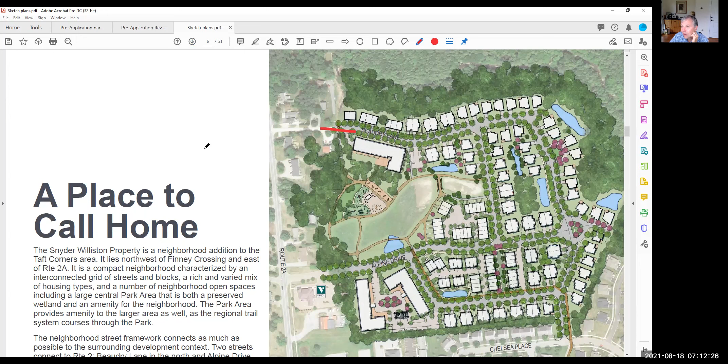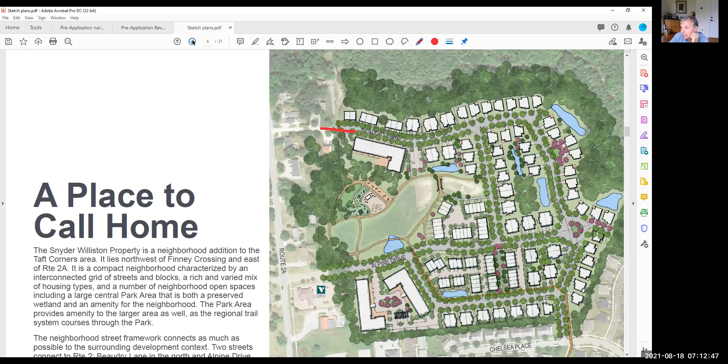One of the things we focus on as a company is that we construct homes. We don't construct houses, we don't construct units. We sometimes interchange those, but the reality is we are creating homes for people. That's our goal as a company, to build homes for people who want to live within Williston. There's a whole description and language that helped us create some of the layout and plans in here, and I'll let you all read that as you go through our presentation.

I think it's important to note where this is located within Williston. You'll see that this property is adjacent to Route 2A and adjacent to Finney Crossing, the Hamlet, and there's some commercial buildings along Route 2A as well. So it's a piece that already has relatively high dense development around it, and we are proposing to meet the planning goals that the town established by setting the bar as a growth center.

This is one thing we thought was really great and important information: walkability and connection. You'll notice there are green dots along this portion of the property, and we're proposing to complete the bike path from the north, basically from Meadow Run. It stops just after it crosses the Allen Brook and dead ends. The idea here as a component to the proposed neighborhood is that we would extend that and connect it all the way over to Finney Crossing on the western portion.

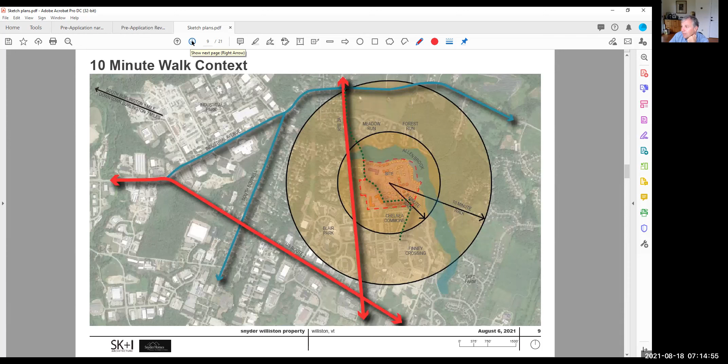So I think that's a really important piece. But with that, you can also look into all the areas that you can walk to within the town of Williston within 10 minutes of this property. So we wanted to highlight the walkability and the context of this neighborhood with the surrounding portions.

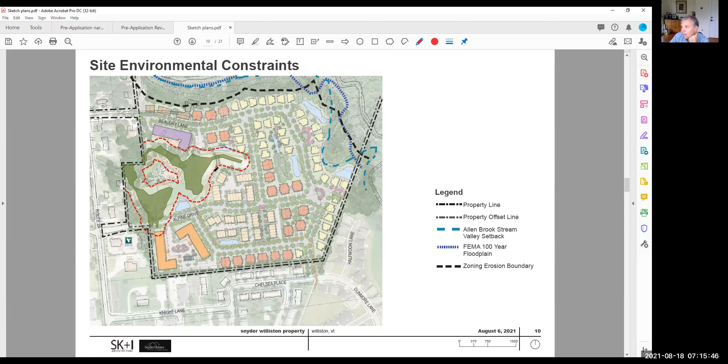Site environmental constraints - obviously the Conservation Commission, there are meadow wetlands associated with the property. They are not connected to the Allen Brook, they are completely disconnected. It's a meadow, but there is upland in the center portion of the property. You're going to see that we have touched or impacted some of the buffer and also some of the wetland. We're obviously working through some of these designs. It's pre-application, and we are looking to get some information and feedback from both the HAC along with your group and the DRB about some of the overall layouts.

This is what I'd consider the graphic representation of our proposed neighborhood. Just so everybody knows, there will be 3 access points. The primary access point will be along Alpine Drive. There'll be a secondary access along Beaudry Lane, and then also off of Chelsea Place and Dunmore - there's already a turnoff located there in preparation for a future connection. So we do have 3 connections into the neighborhood.

You're going to note that our streets have a bit of what I call a movement to them. They are not perfectly straight streets - there's a little bit of a bend, there's bends throughout the neighborhood, and that is done on purpose. One of the things we were focused on was showing how our streets did not need to be perfectly straight. We think it creates a neighborhood, and we think it helps define some different areas.

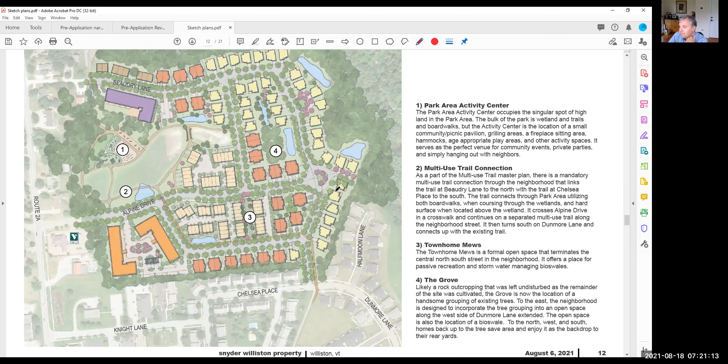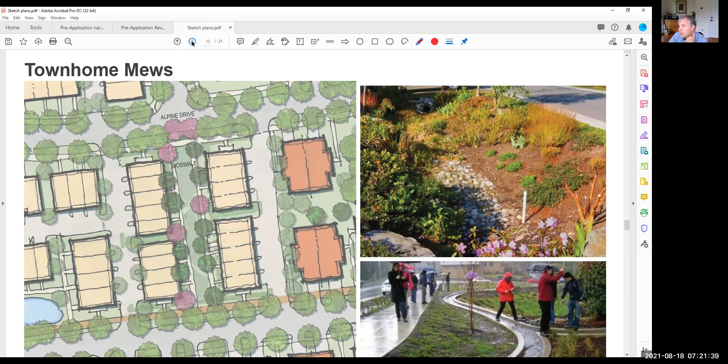This is a bit more detail of the townhome mews and the area between them. Down the center can either be open space, bioswales, or a small rain garden. We're going to have rain gardens or green spaces throughout the neighborhood.

This is a preliminary idea of some of the front-loaded townhomes. These are actually 4-story, with 3-story living spaces, and the 4th floor is a roof deck. Currently not allowed within zoning, but we're working to figure out how we could potentially have roof decks in some scenarios.

This is the rear-loaded townhomes, and you can see these are focused with entry points off the street, and the garages are in the rear. There are quite a few of these rear-loaded townhomes in the proposed neighborhood.

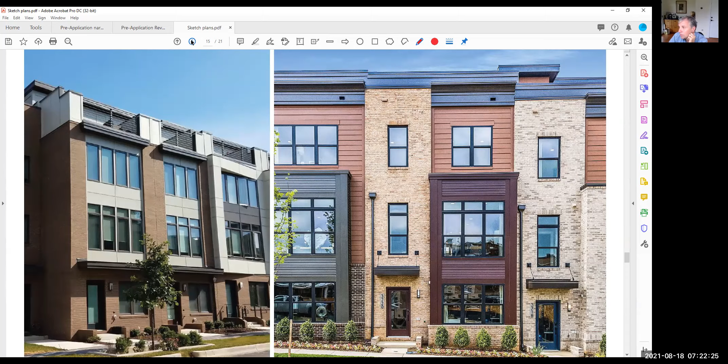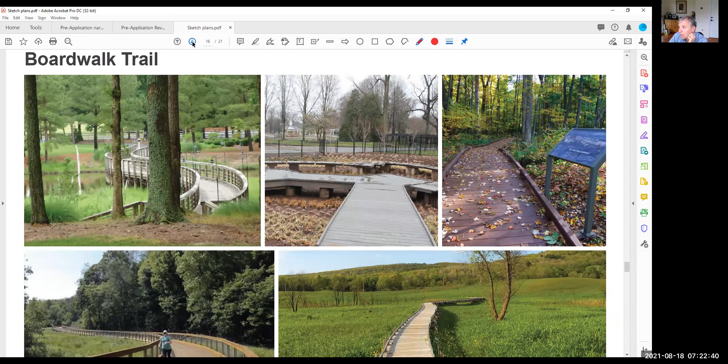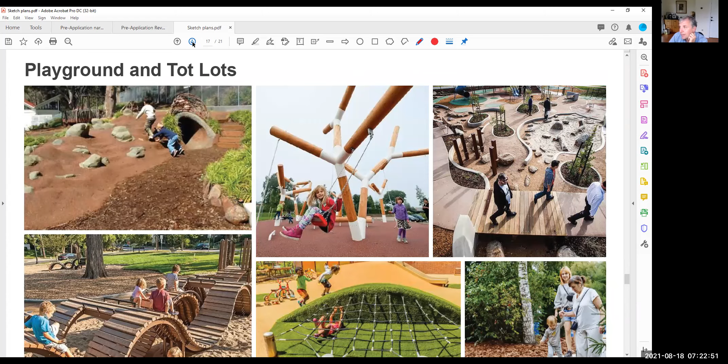Boardwalk trails - we're going to have lots of trails. We may have some raised trails, we may have some paths. It depends on how we end up with the layout of the overall property and how we utilize the park in the upland areas. We're assuming a playground, a tot lot, and some other community garden space within the park area.

Can I ask a question, Chris? That minor public road with multi-use paths - is that an extra wide road with a portion marked as multi-use path, or is it divided between the path and the road? Divided between the path and the road.

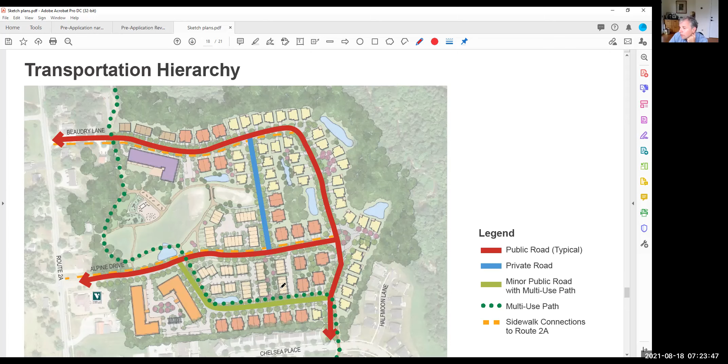Okay, thanks. While we're here, one thing I forgot to mention earlier - we have these apartment buildings adjacent to commercial spaces. So that's commercial, that's office buildings, more commercial. Stove and Flag Works is located here, and Vermont State Employees Credit Union is located here.

One of the things I pushed very hard for and want people to realize is that we have 2 and 3 unit townhomes on Chelsea, and single carriage homes, basically 1-story houses, along Half Moon Lane. You'll notice we mimic what is directly behind those homes, with 2-story townhomes and carriage homes abutting the adjacent homeowners. We feel that's an important component - we're not trying to put a big apartment building directly adjacent to a 2-unit building. Those were existing homes, and we needed to focus our attention on that.

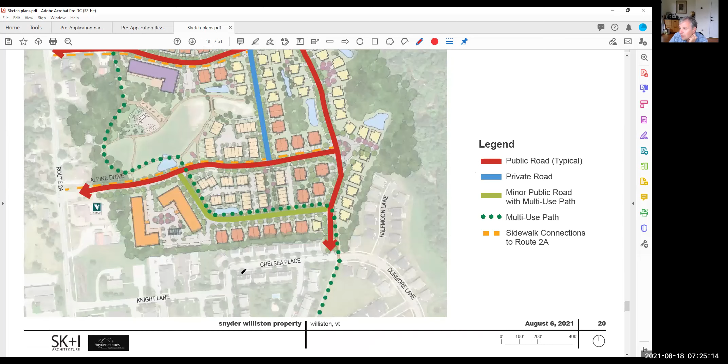We have road sections - public road, private road, some minor public. Here's the minor public road with multi-use path, and you can see how the bike path is separate, and here's the sidewalk over here. So this would be sidewalk, this is bike path, and this is the section of road.

Can you just leave that up for a minute, Chris? Thank you, I'm just looking at the widths of those sections. So that's a 10-foot multi-use path, 5-foot sidewalk, and 28-foot travel lane. It looks like 11 feet between those pedestrian areas and the road. Okay, thank you.

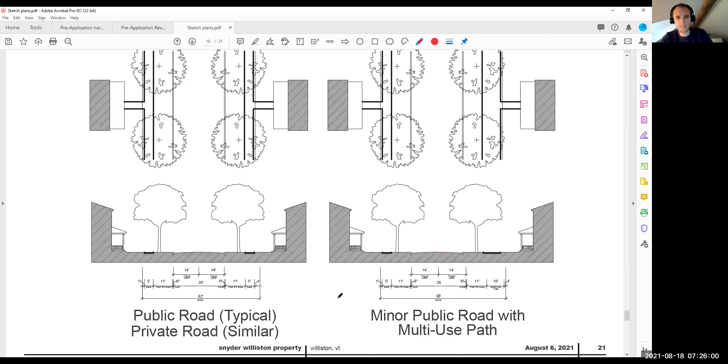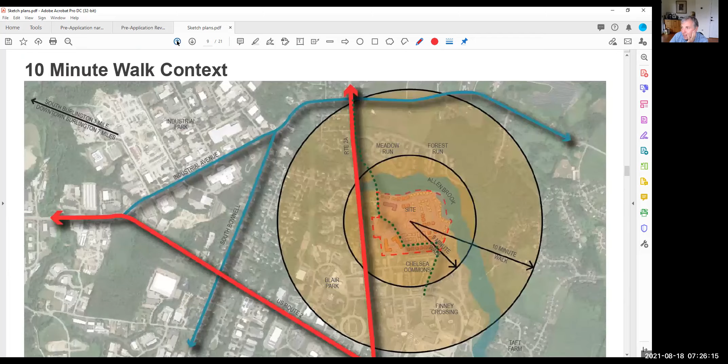So that's really our presentation for today, and we're here to answer any questions. Before we do, Andy, is there anything else you think we ought to discuss? Well, I think that was a really good overview to start.

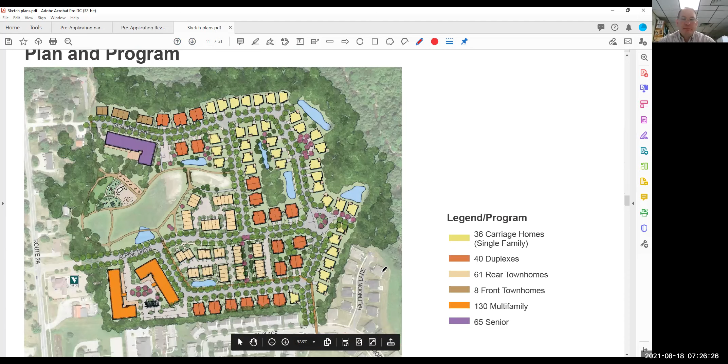Does anybody have any questions for Chris or Andy? Yeah, I got a couple.

On the first part of Beaudry Lane where you show front townhouses and a couple of duplexes, currently in that area there are houses. What happens to those houses that already exist and are occupied at present? There is one existing home in that location, and that would be removed. The church currently owns it and rents it out to one of their pastors, and they are planning that they would have the opportunity to move into one of the units here, but there is only one home that is going to be impacted.

Well, there's more than one home there. There's a White House that's the one you're referring to, furthest to the east? Yeah, that's the one on the property owned by the church. I see, so the ones further west are not on this property. That's correct. And those would remain as is, I'm assuming.

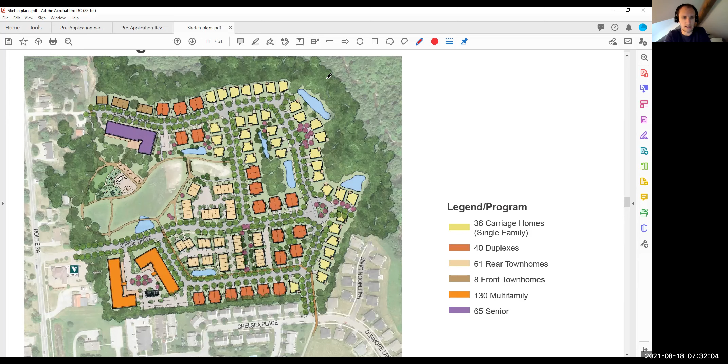Hey, Reed here. I also noticed in the overview that it talked about the decision not to have commercial included in the development, and I just wanted to say that it seemed like a missed opportunity. If we can go to the slide on walking, the radius for 5-minute and 10-minute walking—it looked to me as though there's a lot of easy walking to other residential areas, but about half of the services, businesses, et cetera, in Taft Corners would be outside of the 10-minute walk.

Blair Park is great—there's schools, post office, and that sort of thing. Finney Crossing includes restaurants and grocery and things like that, but it seemed like a missed opportunity to have at least something in terms of services for the folks at the north end.

Is that something you're still considering, Andy and Chris? I think so, we certainly considered it. We have found that

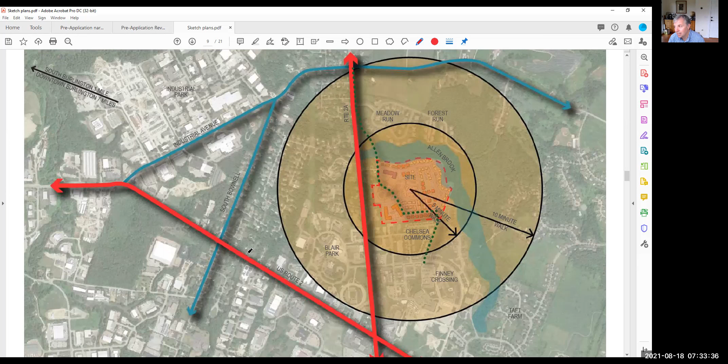commercial does not necessarily want to be located off of a primary route. This particular parcel is set pretty far off of a primary road, so they are not very interested, based on communications I've had at Finney Crossing, about being located off of a primary road. One of the things we would say is the access to Finney Crossing, Taft Corners shopping plaza, Lenny's, and all of those things.

We're right on that 10-minute line, but if you walked 2 more minutes, you'd be at Maple Tree Place. So I think our idea was, hey, 10 minutes is to here, but if you walk 12, you'd already be across Route 2 with access to all these other things. Andy even brought up the point that it might almost be better to show this as a 15-minute walk shed, which would get you a whole lot more. So I guess that's the defining factor, what's reasonable from a walking or connection path.

Now, if you're riding a bike, we're talking a 5-minute bike ride gets you to Maple Tree Place easy.

I'm an able-bodied person, so I look at this and think I could walk to pretty much anything from there, and I actually own a home in the hamlet, so I'm used to walking this area. But I try to think about many neighbors who are not as able-bodied, and for them, just getting over to Healthy Living or something is a decent walk. So I try to be mindful of that.

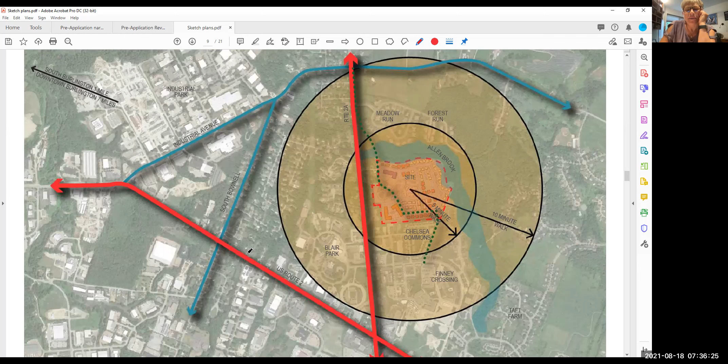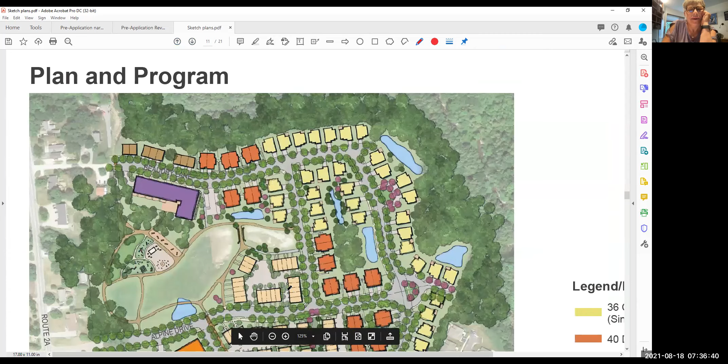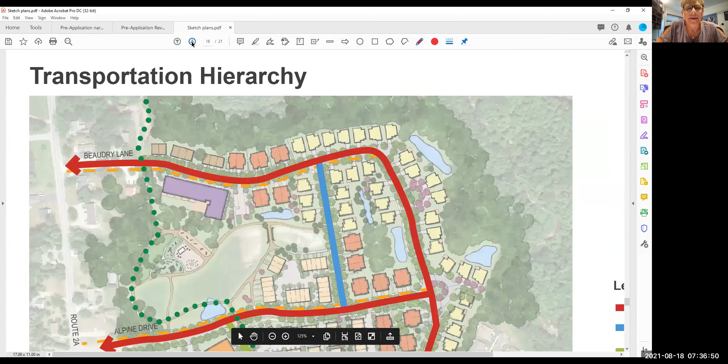Thank you, Reed. Melinda, can you put up the site plan? You want me to stop sharing, Melinda? Or if somebody could put up the site plan with the contour lines, that would be great. Let me find it—right there we go. Oh, this one? Yeah.

So it looks like, okay, boy, it's hard to see, but above the area where you're going to have that area of rocks and trees, if you go straight north, right up to—yep, right there. Okay, so there's a tree line there. How old are those trees? How mature are those trees right in that corner?

I've walked it enough, but I'm not sure how mature the trees are. Andy, what about along this buffer area here—I'm not sure it's old growth trees, I think it's been more farmed than anything else. Andy, is that your memory? I'd agree, I'd want to take a look at that. I know once you get into the steeper slope areas and down along Allen Brook, the trees are much more mature, but I'd want to check that area to make sure it's not an area that, because of its slope, was previously farmed. For a variety of reasons, maybe over the last 10 or 15 years, the forest edge has been allowed to encroach into that area now that the land's not being farmed for a living anymore, so it's fairly early growth in that little triangular shaped area.

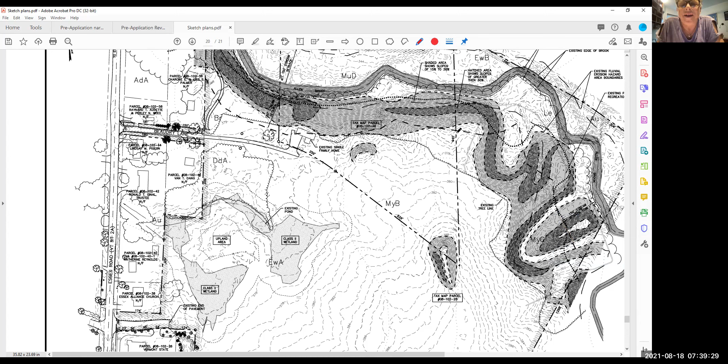Are you talking about in this area here? Nope, okay, go back to where we were talking about that little triangle of trees. So right there, there is a primitive path right along the steep part of the slope on the east side.

If you zoom in a little bit more, Chris, there's two very fine double lines that define the primitive paths through that area.

It's been a while since I've been down in there, but having walked through that area, both on the Brennan Woods side, behind Forest Run, and with Finney Crossing, there's a number of just footpaths through the woods that tend to evolve based upon the nearby residents' use of those. I think at times they get more use, at other times less use. With the pandemic, they may be getting a lot more use.

We weren't involved with the Alliance Church permitting, but I think there was some pushback from the state, having concerns with formalizing some of those trails in terms of maintaining or limiting human intrusion into the wildlife blocks that exist along Allen Brook.

If you look at the larger context here, they extend north to Woodlily and Forest Run, across Allen Brook on the north end of Finney Crossing, and also connect over into the back of the old IBM property, which was developed by Jason Adams, and also a little bit of Brennan Woods.

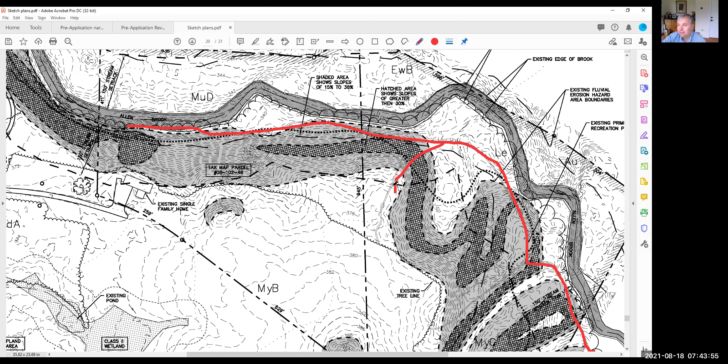We certainly would not be opposed to that, if there was a way to utilize and access and show people how to get there. Yeah, that's a positive thing from our perspective.

So maybe it's worth a little more formal look at it from a couple of us. Yeah, I mean, that is one thing that the growth center would benefit from, is more opportunities to feel like you're in nature without going far away from the growth center. And so this is one of those areas where clearly it's not going to be developed because it's so close to Allen Brook and has some steep slopes, but possibly it could give that feeling of a walk in the woods just 2 minutes from the homes you're talking about building.

I recall, and correct me if I'm wrong, Chris or Andy, but I recall that when Essex Alliance Church was proposing this development, that ANR basically wanted them to take the primitive trails off the map because they didn't want people going down to the Allen Brook, when they were trying to get an Act 250 permit. So I don't know, that may be an issue. Yeah, that may have been the outcome too, what I was remembering.

So I have a question. I lost internet connection, so let me know if you've already talked about this. I was wondering how the Allen Brook would be protected, because that's a wildlife corridor area, and we're losing it pretty quickly. I was wondering about limiting access so there aren't so many people down on the brook disturbing wildlife. I don't know what was talked about, but it sounds like there are steep slopes in those areas that should be protected, but maybe Act 250 already did that.

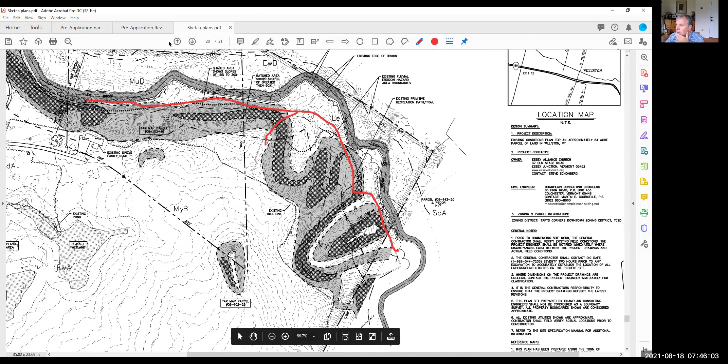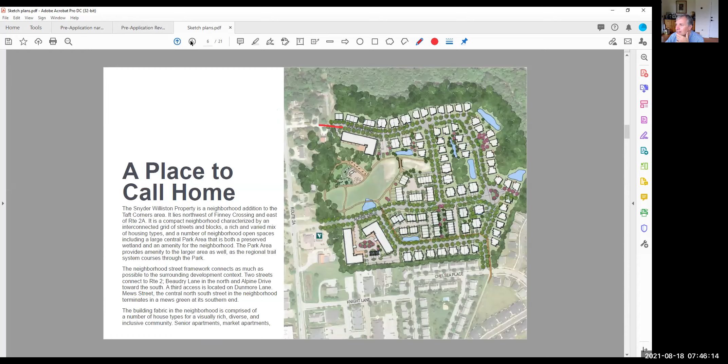So, we're proposing this based upon the town's regulations and steep slopes. We have to follow the town's regulations. Andy, what are the dimensions from the Allen Brook to the back edge, based on the steep slopes? What is the corridor dimension again? Well, the watershed protection buffer applies to everything within 150 feet of the edge of the Allen Brook.

So there are very limited activities allowed within that. Trails, obviously—the bike path crosses through it now. Utilities, I don't think we'd have any short of a stormwater outfall. Stormwater facilities are allowed in those areas if there's no available area outside the watershed protection buffer. So that 150-foot corridor is on both sides, though largely the development is only on one side. There are some places where the property extends to the other side of Allen Brook, but that would be left in its natural state.

So I have a question about how that 150-foot area would be protected. I know in past developments there's been some issue about that area being encroached on, and simply using a line of trees might not be good enough. This is a large development, so you're going to have multiple contractors, multiple truck drivers, and many people in and out of that property. I'm wondering if something more substantial, like boulders or posts, could protect that 150-foot buffer from the brook.

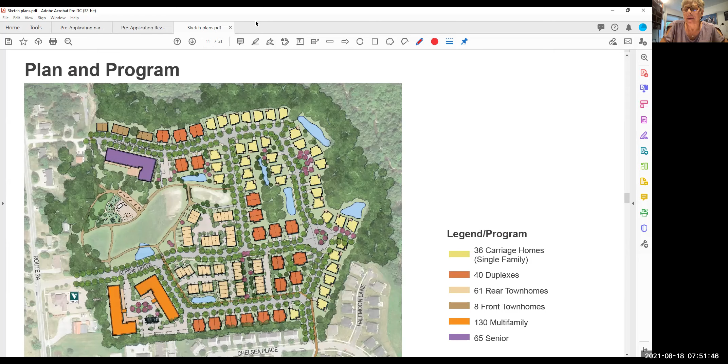One more comment before we move on to the official findings and recommendations: I didn't see anything in here about renewable energy infrastructure related to this development, or energy efficiency standards or things like that. Could you just say anything you have in the plans on those items?

In terms of our construction, we have been following Efficiency Vermont. They changed the terms—it's code compliant energy standards, which are set higher than code. So it's code compliant through Efficiency Vermont, like code plus whatever their requirements are. We have been following that in our construction practices, so the homes are very efficient and meet all of those guidelines.

In terms of renewables, it is hard—we will design houses so that people can put solar on their houses. But everybody has very different perspectives on what that looks like and how it looks. So we do design our houses to allow for that, but then we allow them to do it on their own, not through our prescribed path.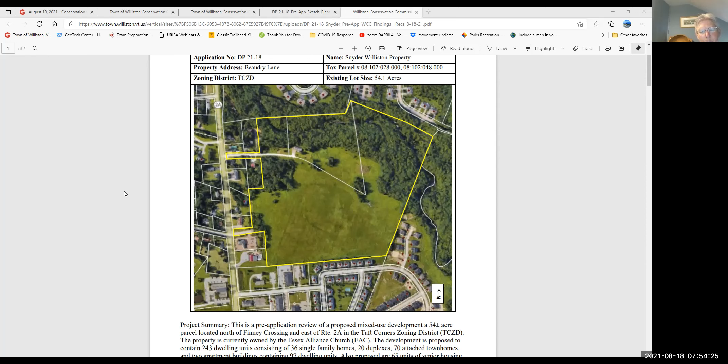I'll throw out one more quickly. There was a slide showing somewhat of an encroachment on the class 2 wetlands with the apartment buildings. I think it was—so you said you'd be addressing that later, but what would you be moving? You can see where it encroaches into the one apartment building. So would you be decreasing the size of that?

Alpine Drive is going to be the area that actually encroaches on the wetlands, and that impact was previously approved through the state. And then the buffer would be, as shown on this current slide, we would—if we're going to be impacting the wetland, we'd probably maintain that impact on the buffer, but that building wouldn't be impacting the wetland anymore because Alpine Drive would have already done that.

So is the state going to come back and reassess these wetlands? How long ago was this looked at? This was looked at and approved back in October of 2020, so it's recent—within the last 10 months that this was re-reviewed and reapproved, including a wetland delineation. The wetland delineation was redone in September of 2020 and then reviewed and approved by the state in October.

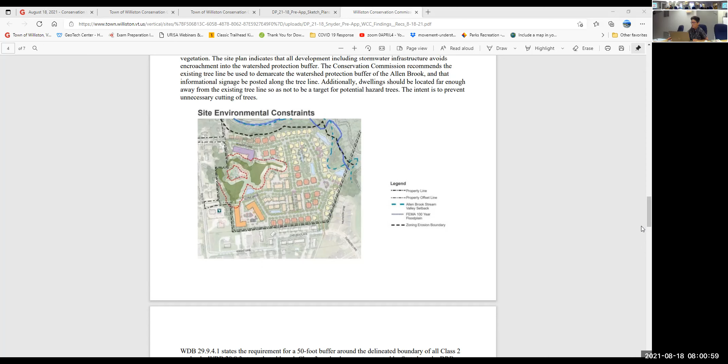It's recommendation number 6: shift the location of the urban park to align with the upland area and to avoid impacts to the wetland buffer, and adjust the locations of buildings so that they are entirely outside the watershed protection buffer. So that is in the recommendations. Any further comment on or additions to number 6?

I was just going to say, Terry, you were talking about moving the road to avoid going through the class 2 wetland, is that right? Yeah, I guess, and they were talking about putting curves in the road. Well, that would be a good area to do that, to slow down traffic a little bit with traffic calming and avoid the buffer.

I just wanted to say, as you were saying that Terry, I was looking at the map that was up and it looks as though the property line goes into the buffer, so the road can't actually avoid it completely, but it might be able to skirt closer to the edge of the wetland. What if we say, to the extent that the road can curve to avoid the wetland, we would like to see that to avoid impacts to the wetland buffer. And I think we should say wetland and wetland buffer. Yes, I think right now it's doing both.

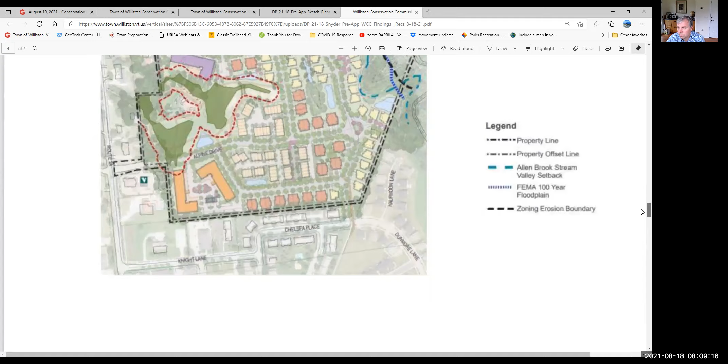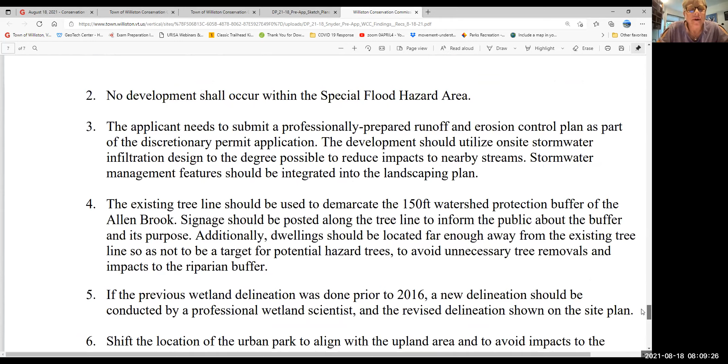All right, thank you. I think we should go back to recommendations. I know we're over time, but this is important. So if we could start with recommendation number 1 and just go through them, because I think we need to let Chris know what the recommendations are, so we can move forward.

So we're asking for a habitat disturbance assessment by a qualified wildlife biologist as part of the discretionary permit application, because of the significant wildlife habitat and corridor that's there. Any comment on that? Fine, sounds good. Okay, number 2.

Hold on, okay, thanks. No development shall occur within the special flood hazard area, and from the plan, there was no development planned.

So number 3, the applicant needs to submit a professionally prepared runoff and erosion control plan as part of the discretionary permit application.

The development should utilize on-site stormwater infiltration design to the degree possible to reduce impacts to nearby streams. Stormwater management features should be integrated into the landscaping plan, and it sounds like rain gardens are something that is thought about. Chris, are you planning on a runoff and erosion control plan? Yes. Okay, any other questions about number 3?

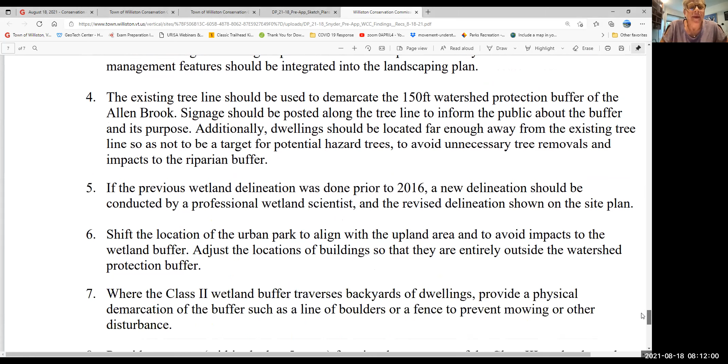On this one, we talked about something more permanent than just the tree lines, such as boulders being used to protect that edge. So I think the existing tree line—number 7 below actually addresses that partially, but I think 7 is where you don't necessarily need to have it entirely along the tree line, but where people are likely to encroach or mow.

And the other thing that's included in number 4 is signage, which I think is a good idea. Yeah, that's fantastic. When people move in, it'd be great if the first thing they read in their backyard is, please don't go beyond this, and here's why.

I think it's important because I've spoken with people from some of these developments, like somebody on Half Moon Lane who was clearing trees in the buffer. I noticed a whole bunch of trees had been cleared, and I saw somebody in their backyard and asked him who's been clearing these trees. He said, oh, I have. They seemed dead, and I thought it would look better if they were all cut down and cleared. He simply didn't know what the buffer was or what its purpose was.

So for that reason, I think some education should be done. I would even go so far as to say we should develop a brochure that we can hand out to the homeowners associations or each new homeowner that moves into one of these new developments—they get a brochure explaining about the buffers.

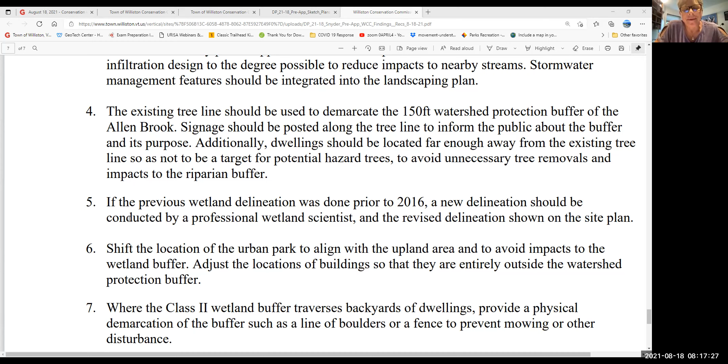Thank you, Kim. I think people are just going to do what they're going to do no matter how much signage there is. But do we agree signage is a good idea for number 4? Yes, it meets them at the point where they might do something bad. I agree.

All right, moving on to number 5: if the previous wetland delineation was done prior to 2016, a new delineation should be conducted by a professional wetland scientist. Chris, it sounds like it was not done prior to 2016. That's correct, it was done in 2020. Okay, we'll have that study as part of our review.

That one - number... I'll scratch it, I'll take it out. Okay, not necessary. Thanks, Melinda.

Thank you. Number 6: shift the location of the urban park to align with the upland area and avoid impacts to the wetland buffer, and adjust the locations of buildings. We already went through this, sorry. Okay, let's go on to number 7.

Unless someone wants Melinda to reread 6. I guess what I've got is just: minimize impacts to the wetland and wetland buffers to the degree possible by shifting the locations of infrastructure such as the urban park, the road, and buildings. All right, yeah, good.

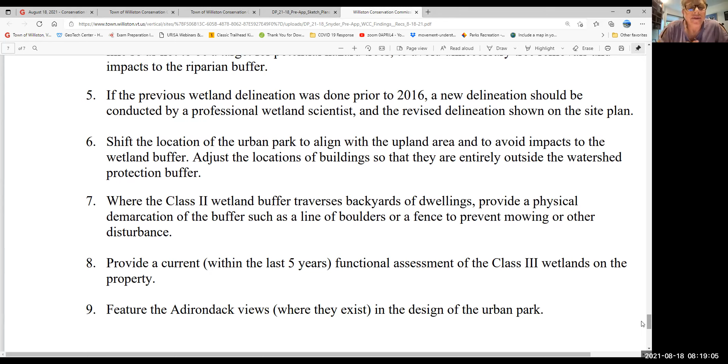All right, number 7: where the class 2 wetland buffer traverses backyards of dwellings, provide a physical demarcation of the buffer. We talked about this, such as boulders, and it sounds like Chris knows what works well.

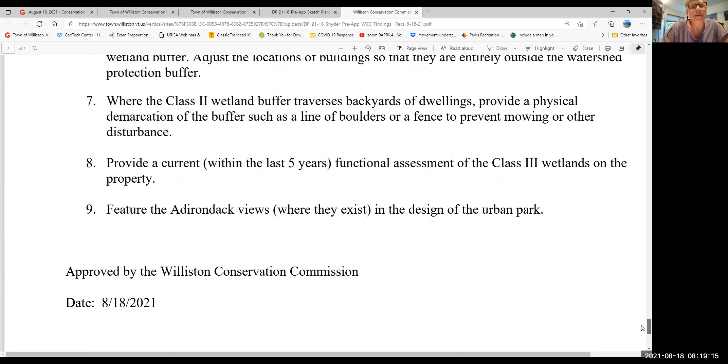Let's go on to 8: provide a current, within the last 5 years, functional assessment of the class 3 wetlands on the property. Yeah, I saw those were south. Chris, do you have any information on that? The class 3 wetlands are, I think, in the southeast corner of the property, and they're extremely isolated - it's a dip in the meadow area, probably not even wet. We can provide the report from the ecologists who did the work last fall. Okay, great. We'll see that in the next round of review.

Number 9: feature the Adirondack views where they exist in the design of the urban park. Any comment on this? I like that you guys are looking for ways to do some rooftop patio kind of stuff, because there are beautiful views from this area, and it would be a shame for folks to only see it from the ground level if you have structures like this. This is something we haven't focused on as much in other developments, so I'm glad to see there's a recommendation here. I'd like to see it stay.

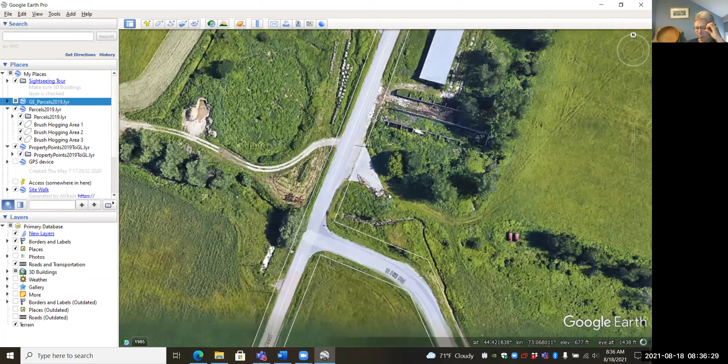I'm not sure that the town owns this or whether it reverted to Cycles. It's an interesting question - that triangle basically there. Yeah, that was the road, and they just made that bend. If you zoom out, they made that sharp bend to force people, basically, is what I think the intent was. I think Cycles definitely park stuff there.

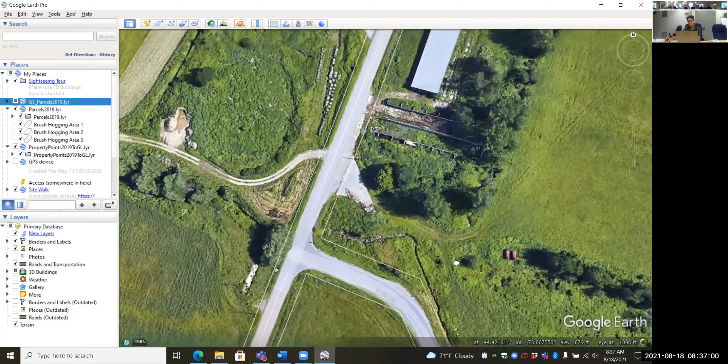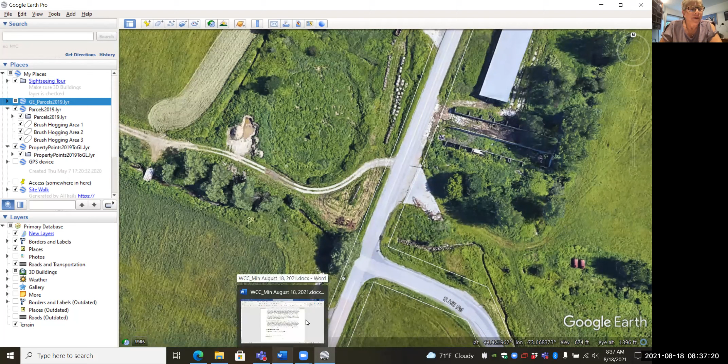They do, but I don't know if they own it. It's a potential spot for people. I think we can just explore that - that's a good idea, Terry. So let's leave that because we don't know, and we're a little bit behind time. Melinda, is that something you could find out about, that corner?

Sure. Okay, thank you. All right, let's go back to the other items we had talked about at Mud Pond to fill Melinda in. Let's see.

You want me to share that screen again? If you could share it again, it'll jog my memory. Okay, let's see - this one. Well, Melinda's bringing that up. I just wanted to mention the idea I had for putting bark chips or mulch on the trail.

That was just in the spots where the roots were really exposed, because I don't know if it's just since COVID that they got so worn down, but there are several spots where the roots are so exposed. So I don't know if that would be a viable Boy Scout project or volunteer project, to just fill in some of those areas with wood chips.

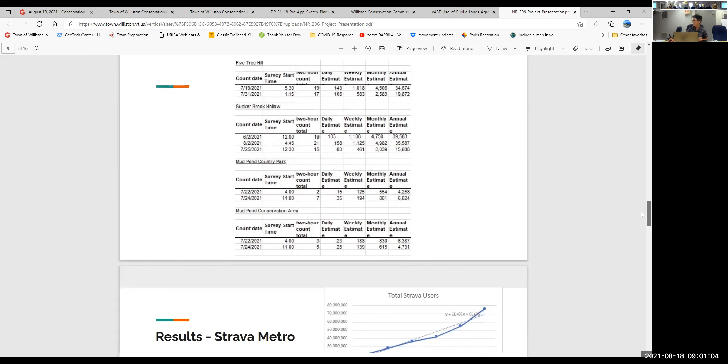So it was nice to see that the numbers from the trail surveys kind of align with the anecdotal evidence we have of trail usage. It's something I would like to increase the manual surveys for. I know Anne has done a bunch of them, so I would like to pull those into this calculation and see what we get.

What was interesting is the Strava data show a marked increase from 2019 to 2020 at Sucker Brook. Not a surprise, since that's when COVID kind of took off, as well as at the Mud Pond Conservation Area. So I thought that was kind of interesting to see.

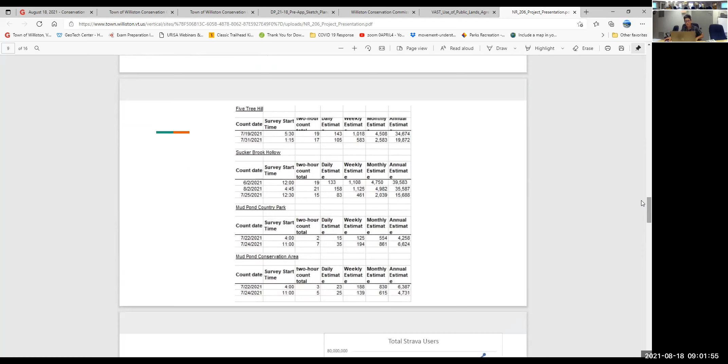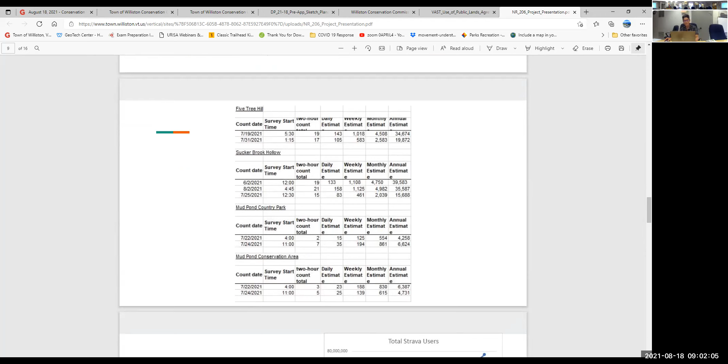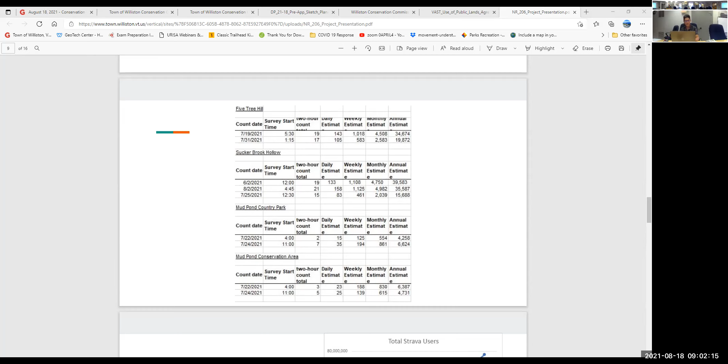I would like to continue working with future classes to refine this and see if, maybe by using trail counters for calibration, we can potentially do something with Strava Metro data that's more meaningful, or continue working with the manual surveys. I know you had talked about conducting a survey asking questions of trail users, so maybe we should do that with this fall's class, have them develop and conduct an online survey or a survey at the trailheads.

I just want to encourage the students, I don't know if you can pass this along, to think about writing this up in a really accessible way. There are some undergraduate journals, since the comparison of what Strava produced versus what this method produced would be interesting.

People are really looking at that, and it would be super cool to have them contribute to that conversation. I think that's just as legitimate as any faculty trying to figure it out. It's another piece in the puzzle as we think about what these new technologies lend in terms of understanding usage. I don't know if they really have the time or desire to do that, but I just want to validate that it's cool if they wanted to.

What part of the population uses Strava? I've really never heard of it. And I think that's a big question, right? Is it this growing thing?

It's really popular among people that are recreating for fitness or training purposes, so I'd say the vast majority of competitive cyclists are using it. I think it's true in the running community, trail running too. It really grew a ton during COVID, because the way it works is that in addition to tracking, you can create segments, and it keeps track of the fastest people on the segment. So during COVID, when there was no racing, all these Strava challenges emerged, with attempts to set fastest known times or get King of the Mountain or Queen of the Mountain on different difficult segments. And so it sort of blew up.